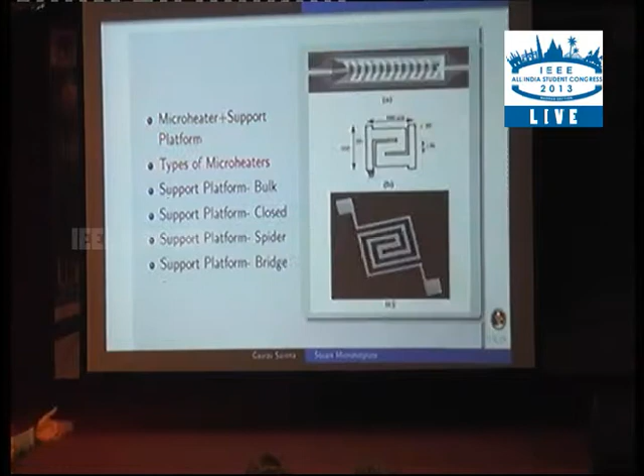So a micro hot plate consists of a micro heater and a support platform. A micro heater is just a device which works on the Joule heating principle. It is just a simple resistor made of platinum or other material. So when a current or voltage passes through it, it generates heat. It is used in a gas sensing device to provide an operating temperature at which a particular gas can be detected. Next is the support platform on which this micro heater sits.

There are various types of heaters reported in literature. I have shown a few here. It could be a meander heater, an S-shaped heater, or a double spiral heater. The motivation behind the different shapes of heater is we need good thermal uniformity in the active area. So in order to achieve that, we design different shapes of micro heaters.

So the first one I have shown here is the meander. Meander is the most common and simple structure used as a micro heater, but it suffers from high thermal non-uniformity, which is not good for our gas sensor sensitivity. So that's why people came up with different shapes. But with the shapes, we have to look at the active area, our sensor area, also. So that's why the S shape and those came. This one was fabricated at IISc Bangalore, Valmati madam.

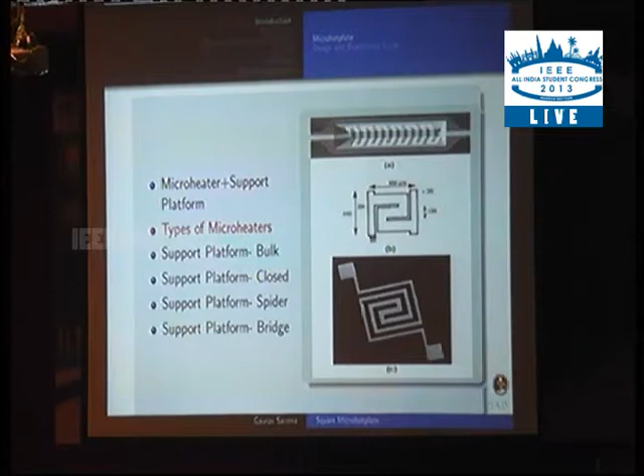In the type of support platform, we want to reduce the thermal losses from the bulk substrate. So for that, people are using glass as a bulk. Next, they are using closed membranes. This we have fabricated at Bombay, on wafer level. So this is a closed type membrane in which we have a silicon wafer etched, so as to reduce the thermal mass of the substrate.

Next, we can minimize the thermal mass even further by using suspended structures like this. It is a spider kind of structure in which there's a supporting beam supporting the platform on which the heater will sit. The next is a bridge in which we just have two. In these kinds of structures, we are able to reduce the thermal mass, but the fabrication complexity is too much. So that's why we have gone for a closed type structure.

So in the design realization cycle, once we have an idea, once we want to fabricate a gas sensor, we want to implement a new idea or new concept and realize it through fabrication. We first go through the design cycle in which we have to take care of the fabrication aspect, the performance requirement and the practical aspect.

Performance-wise, we need the lowest power, as obvious. We need lower size. We need good mechanical stability and fast response time, right? Apart from that, the fabrication aspects are also important, in which we have to take care of the material we are planning. Is it CMOS compatible or not? Or what is the cost of the material?

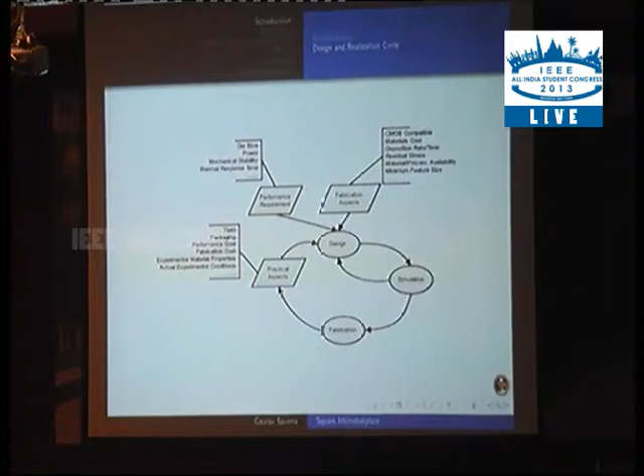And then the practical aspects, which are most important, come from your previous experience, like you have to consider the yield also. If you have a membrane with thermal residual stress, and you want to make it thin to reduce the thermal mass, this will cause an issue with the yield. So taking this into consideration is very important in the design phase.

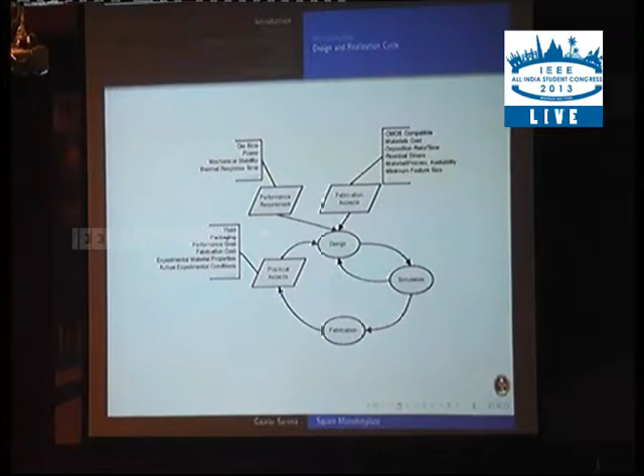So by taking all these three parameters into consideration, we go for the simulation. We'll see if our desired requirements are met or not. We'll re-simulate and design, and then we can go for fabrication. After this, again the cycle will continue with the practical aspect. Have we met our goals? So this is how the whole research will go. It's not for this work only, it will go on for whoever is going to take up this research further.

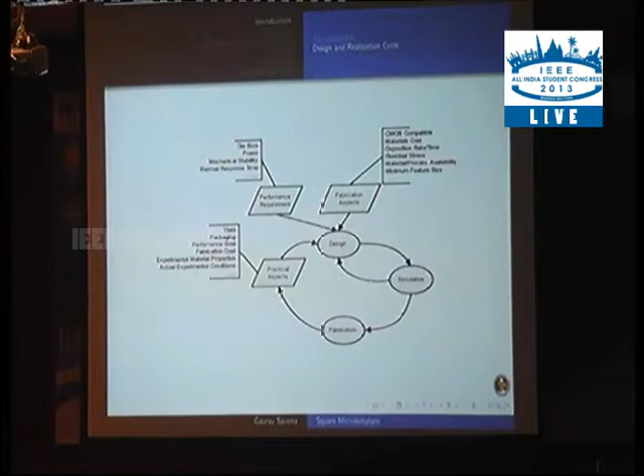So taking the cost of the fabrication and the fabrication complexity, we have chosen a closed type membrane and the S-shaped heater. This S-shaped heater is going to define the active area. The active area is the area where the sensor is going to sit.

Hey guys, hello. Yeah, I am boring you. Please. Are you getting what this is all about? Are you getting the idea? So I'll try to make it brief.

So the membrane composition and lithography limits are all going to influence the performance of my micro hot plate. So we have chosen the membrane material to be silicon dioxide and silicon nitride. Silicon we deliberately kept in our membrane to provide the yield and improve the mechanical stability of the device.

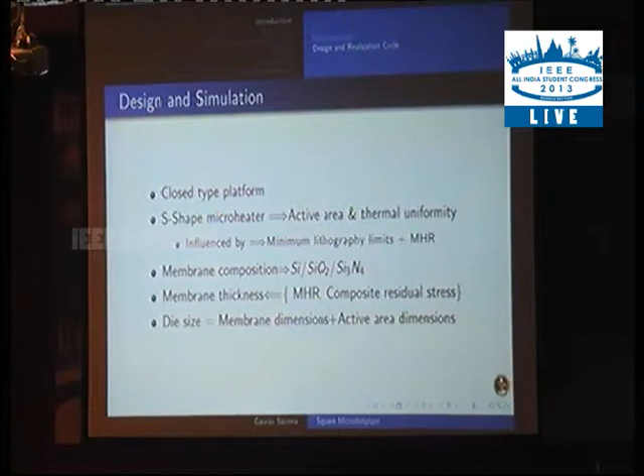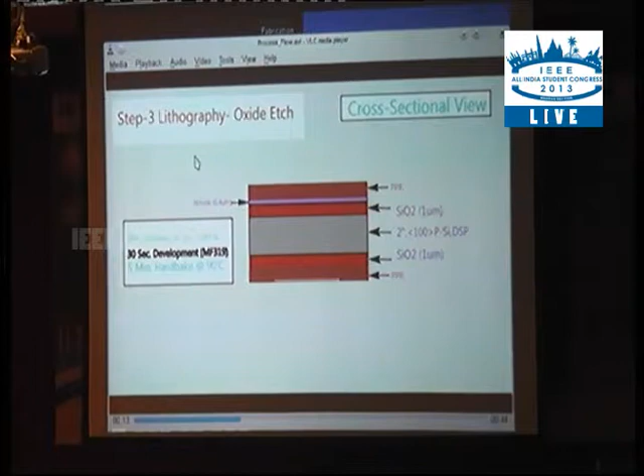So next I'll go with the fabrication flow, how we actually fabricated at IIT Bombay and realized these dies which you are seeing here. You play the video. So this is the fabrication flow, the step-by-step procedure which we followed for realizing these dies. Just go through this and I'll walk you through step by step. So first we have a silicon substrate on which all the fabrication process will be carried out.

For fabrication, we have a simple silicon substrate. I can show you what the 2-inch silicon substrate looks like. It's a 2-inch wafer, 100 orientation. So the first step is to provide a silicon dioxide thermal insulation layer by a thermal oxidation process. This will be a part of our membrane on which our microheater is going to sit.

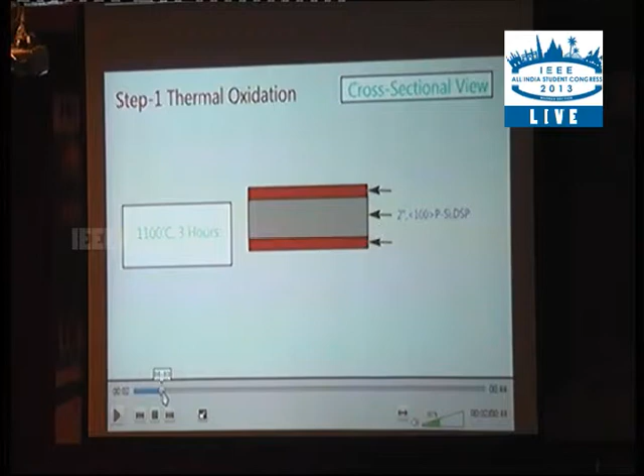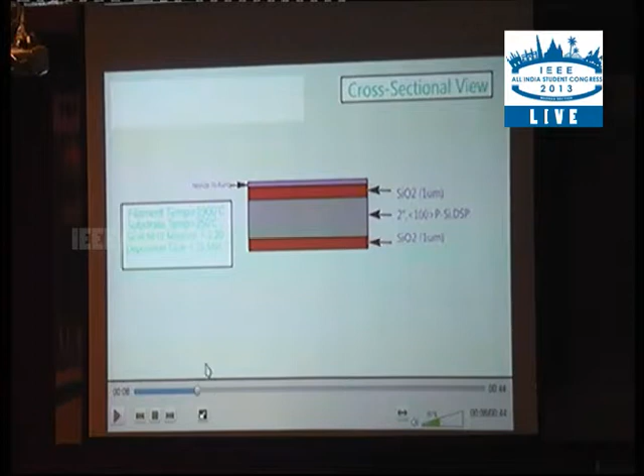In the next process step, we provide a silicon nitride layer to minimize the residual stress, because residual stress plays a huge role when the temperature increases. This will cause bending in your membrane, which may ultimately lead to breakdown of your die. To take care of this, silicon nitride has a tensile stress and silicon dioxide has a compressive stress, so they cancel each other's stress. So a layer of silicon nitride is deposited after this.

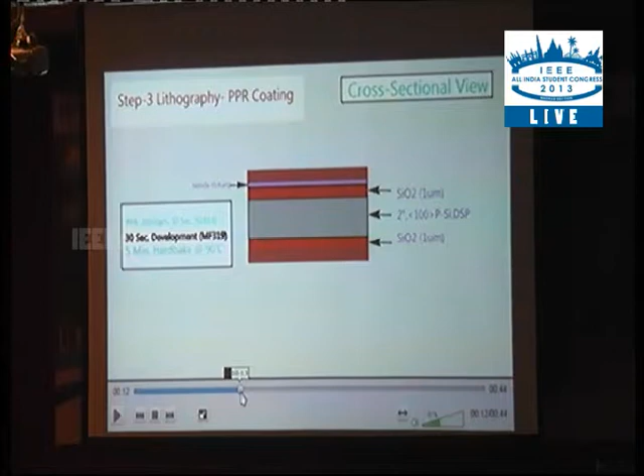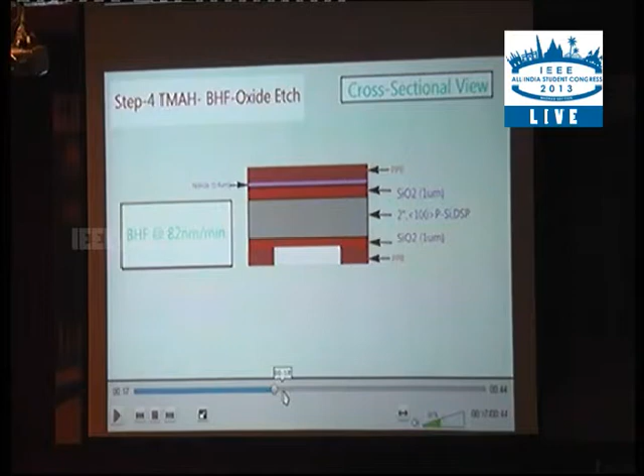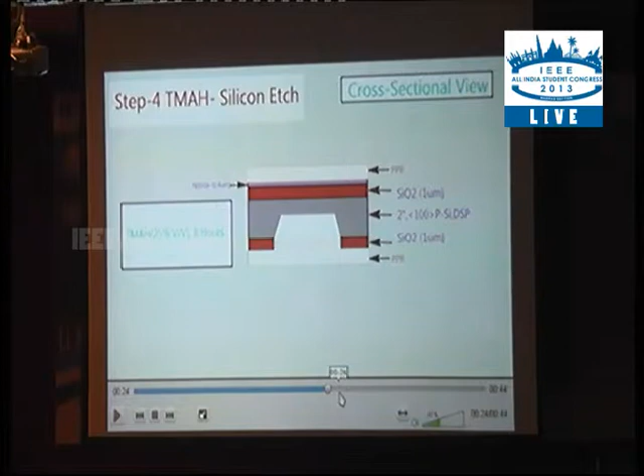So now we are going for the lithography process step, in which we will first coat a PPR layer. This is the HPPR layer, so this thickness is quite thick. It's around 1.5 micron thick. So we are going for back etching, where we are going to etch the silicon in order to reduce the thermal mass. So this will be done in TMAH, or tetramethyl ammonium hydroxide. This is a silicon etchant to open the window in the back.

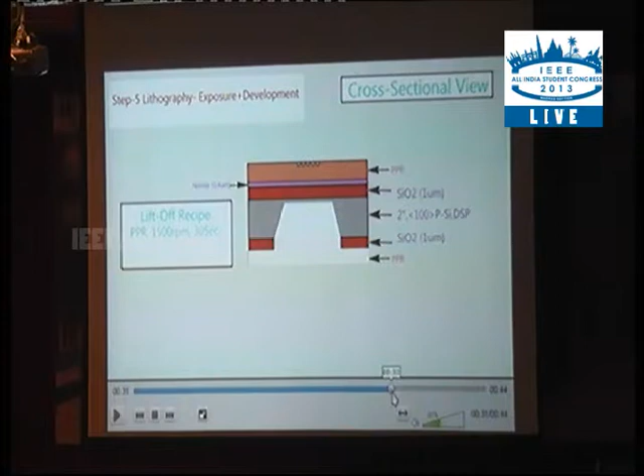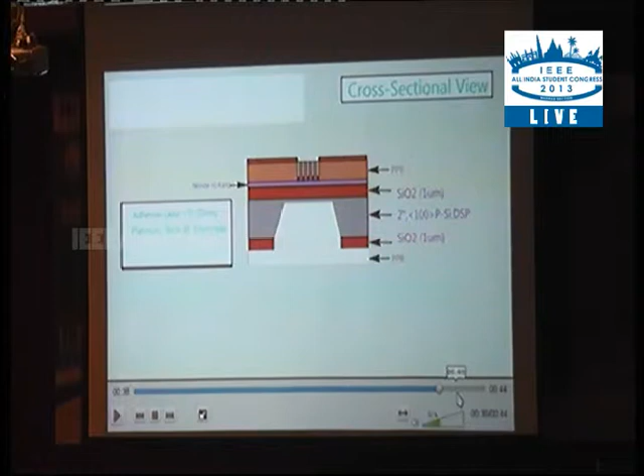So now in the next process step, we are going to define our microheater, which is a mesh-shaped microheater made of platinum. So this is our lithography step, developing it. Now we are going for titanium platinum sputtering. So ultimately the liftoff will be happening, and we will be having our micro hot plate ready for characterization.

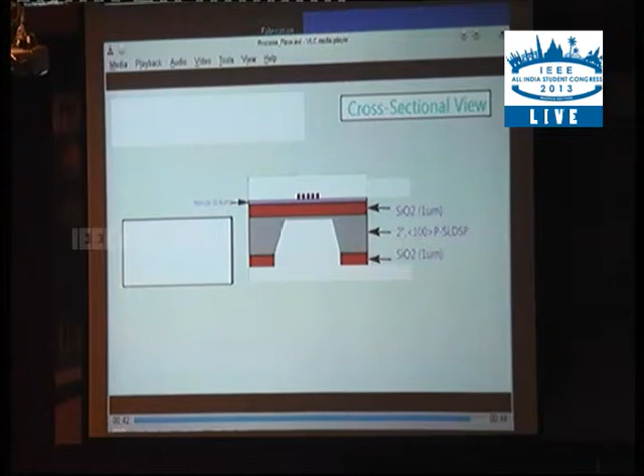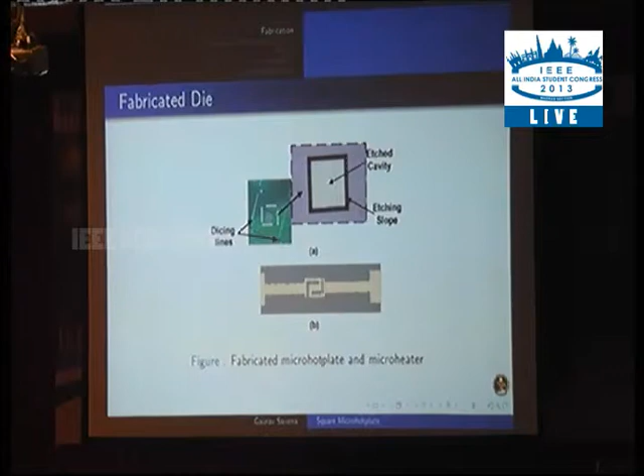So this is the optical imaging of our die. So this was on a wafer level. So after realizing our micro hot plate, we need to dice each die. So a single die, as you can see, it's 4.5 mm by 4.5 mm. So after dicing these dies, we have to mount them for testing and characterization. So for this, we have designed this PCB.

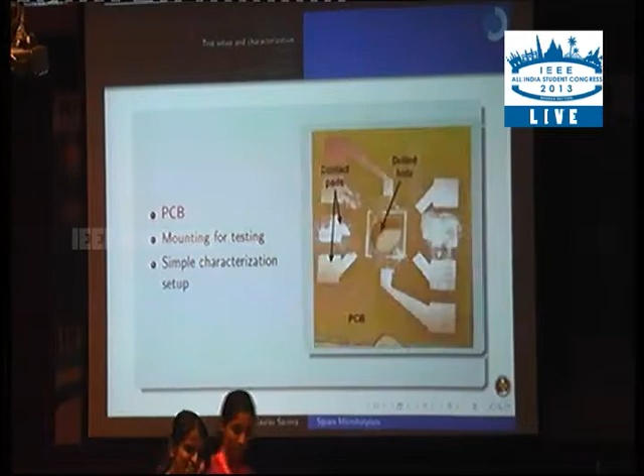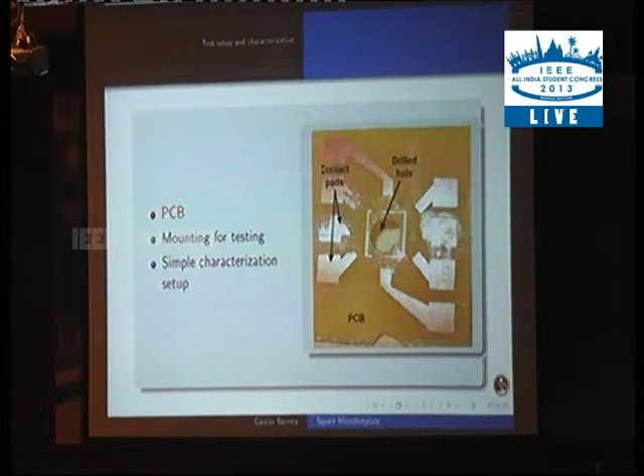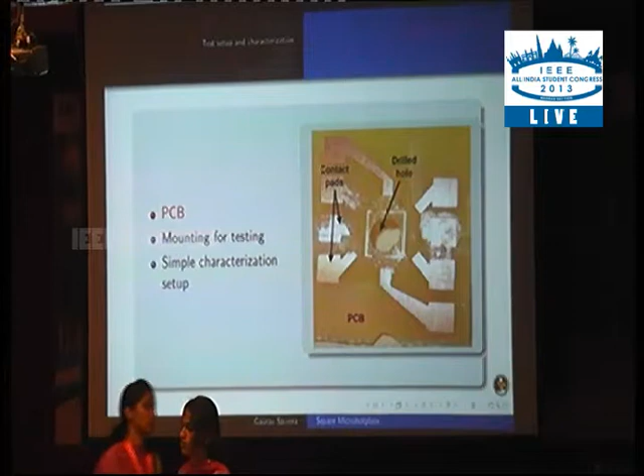So this PCB we have designed, in which we have deliberately drilled a hole. Why? Can anyone answer why we have drilled this hole? See, already we are looking for minimizing the power, and power can be minimized by reducing the thermal mass. So this PCB will also conduct the heat through it, and it will increase the power consumption of the device. So in order to reduce that power consumption, we deliberately drilled a hole over which our die will sit.

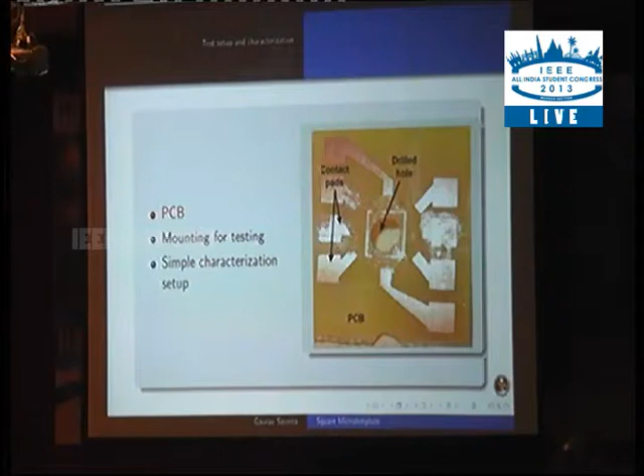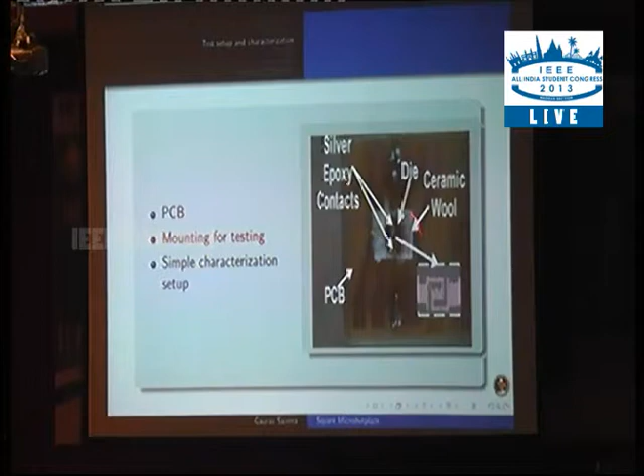Then our die is sitting, you can see the small die there. So it is sitting on ceramic wool. Again, ceramic wool is a very good thermal insulator. So in order to reduce the thermal losses and to improve the power consumption, we have used this ceramic wool. So you can see the contacts for these dies are made of silver epoxy paste.

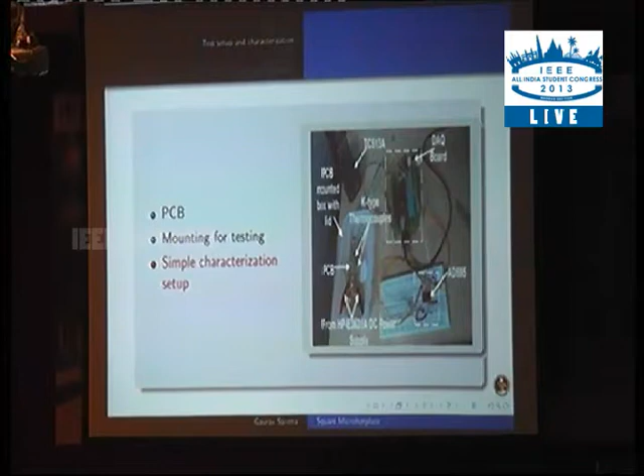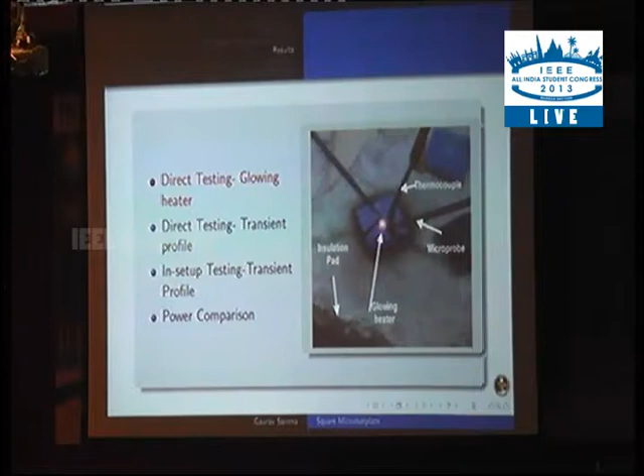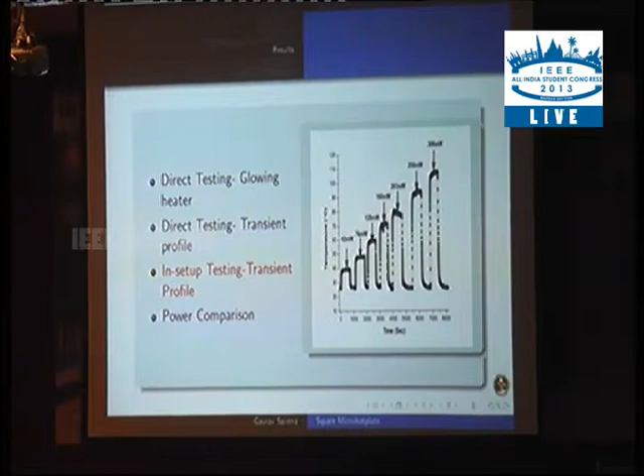Then a few results. So before testing this die on our testing setup, we did direct testing on the die itself using microprobes. So with 175 milliamperes of current, you can see this heater is glowing. The temperature here is 700 kelvins. But when we did the testing on the test setup, because the silver epoxy contacts have very low current carrying capability, the highest temperature we could get was 380 kelvins.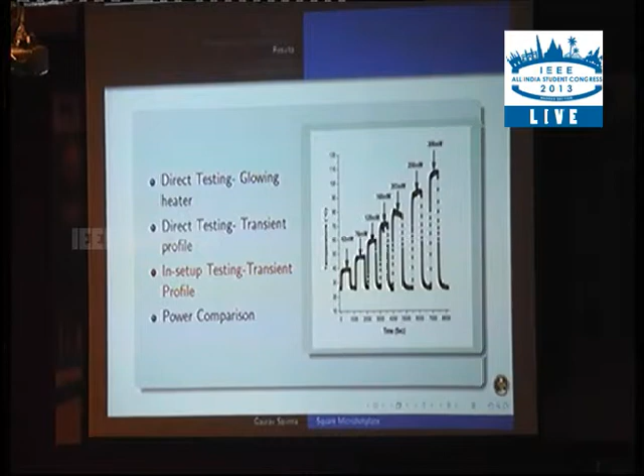It's because it has a high contact resistance and very low current carrying capability. So the contacts will burn out if you try to feed more current into it. So in power comparison, we compared the experimentally observed power with the simulated power, and it was in very close agreement.